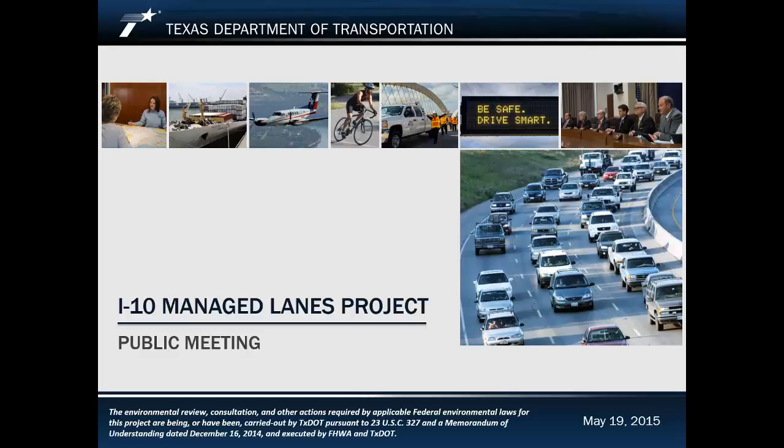Welcome to the I-10 Managed Lanes Project public meeting. We appreciate your interest and involvement in this project. The brief presentation will provide a basic overview of the project and let you know where to go for more information. Your input is critical to the project development process, and we look forward to hearing from you.

The purpose of our public meeting is to provide you with information on the proposed I-10 Managed Lanes project, which would add capacity to I-10 from FM 3351 or Ralph Fair Road to Loop 1604. This will be accomplished as follows. We will start by discussing how this project is tied to the $825 million plan. We will then explain the concepts as well as the benefits of utilizing managed lanes.

Next, we'll provide you with various project-specific details, including a summary of the environmental review process, a project development timeline, a proposed 3D video rendering, and multiple project schematics and exhibits in the next room. And finally, we will provide you with the anticipated next steps for this project and let you know of the many ways you can submit comments.

On April 28, 2014, the Policy Board of the Alamo Area Metropolitan Planning Organization, or MPO, unanimously approved amendments to the region's short and long-range plans to accommodate the $825 million plan. The $825 million plan represents a strategic partnership among the listed entities to implement multiple projects within the three corridors in San Antonio. This plan, which took years to develop, required a close working relationship between each agency and extensive public involvement.

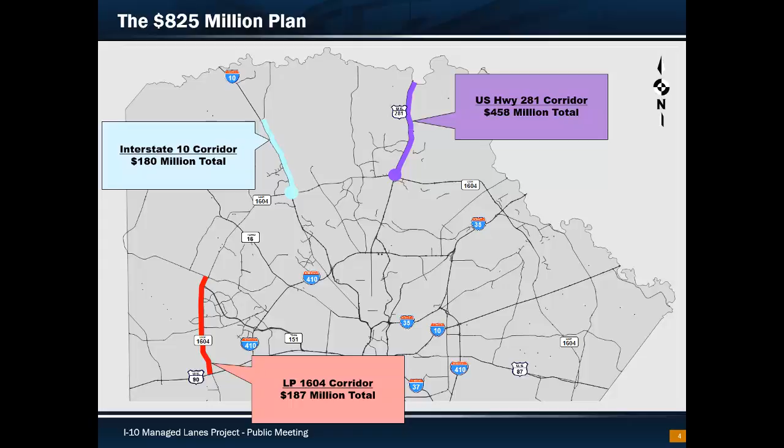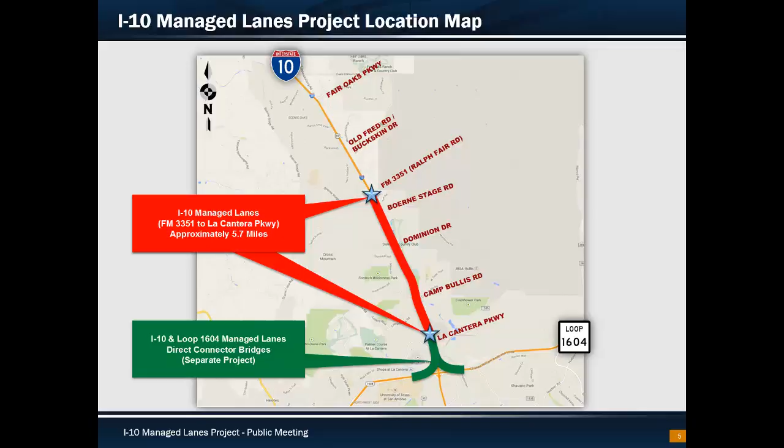When increased demand is combined with limited capacity, as in the case of the I-10 corridor, the result typically leads to traffic congestion. There are three possible solutions to mitigating traffic congestion. The first would be increasing capacity, which typically involves constructing additional travel lanes along the corridor. Second would be reducing demand, which entails encouraging the traveling public to utilize van pools, mass transit, or other alternative modes of transportation. And third would be controlling access or limiting the number of vehicles utilizing the interstate system.

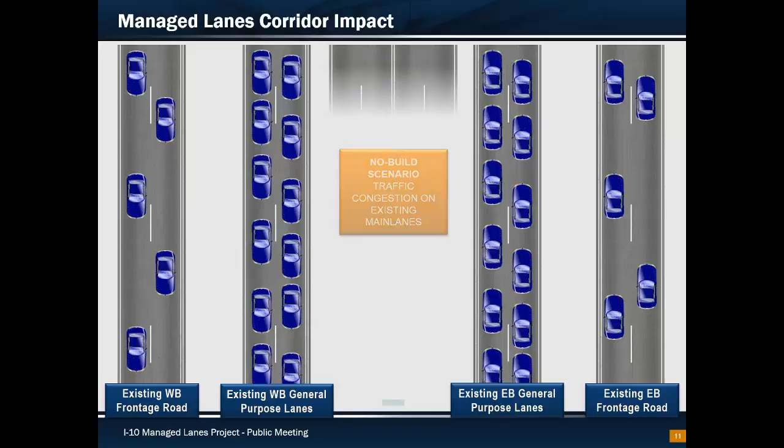By implementing the managed lane system, there will be a reduction in the general purpose lane utilization, an increase in general ridership, and additional alternative modes of transportation available to the public. This build scenario will ultimately reduce traffic congestion, provide a reliable alternative for motorists, and overall move more people through the I-10 corridor.

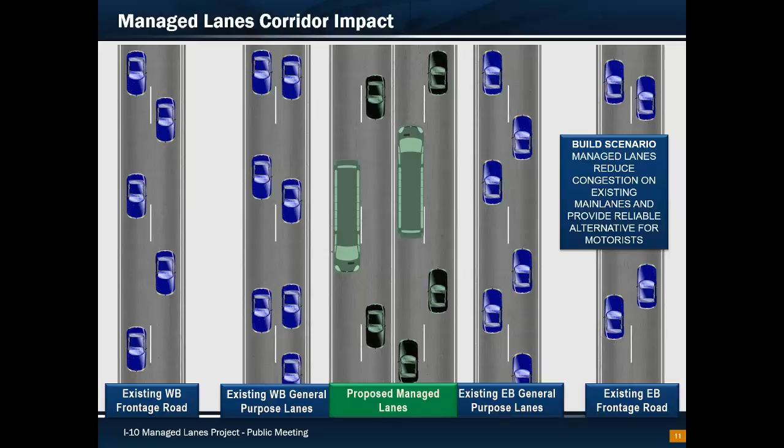As you can see, this will not be the first application of the managed lanes concept on a highway system. As of 2015, managed lanes have been implemented and are currently in operation in more than 30 locations throughout the United States. The benefit of this fact is that the Alamo RMA can utilize the lessons learned on previous applications to implement a more efficient and successful system from the start.

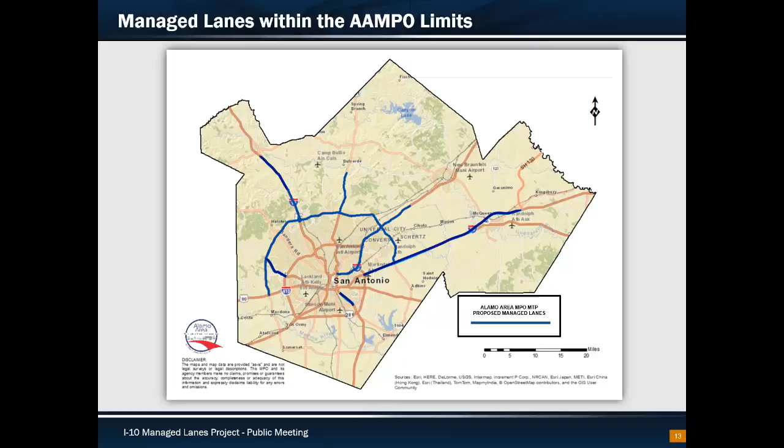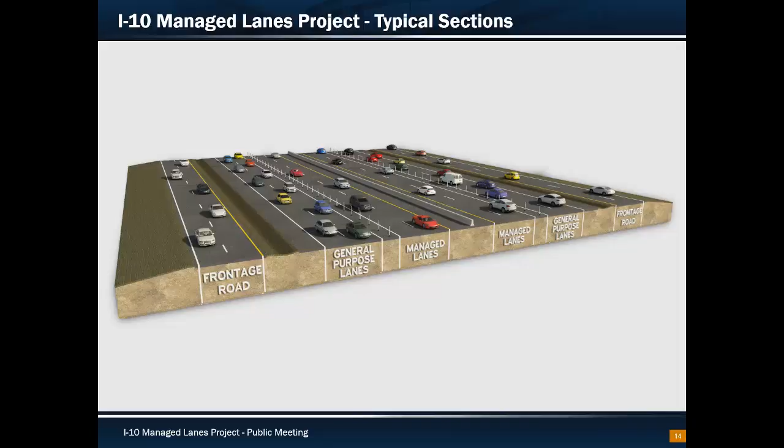The existing I-10 corridor consists of 2 main lanes in each direction with frontage roads as shown in this typical section. The proposed I-10 corridor will consist of 2 additional managed lanes in each direction while maintaining the existing main lanes, now referred to as general purpose lanes, and frontage roads in place as shown in this typical section.

As you can see, the proposed managed lanes will be located in the center median between the existing main lanes and will be separated by a proposed concrete traffic barrier. Also, the managed lanes and general purpose lanes will be separated by a buffer area that will include plastic pylons. While this graphic shows a typical section of the proposed corridor, it should be noted that the managed lanes will have entry and exit access points in each direction in the vicinity of Dominion Drive.

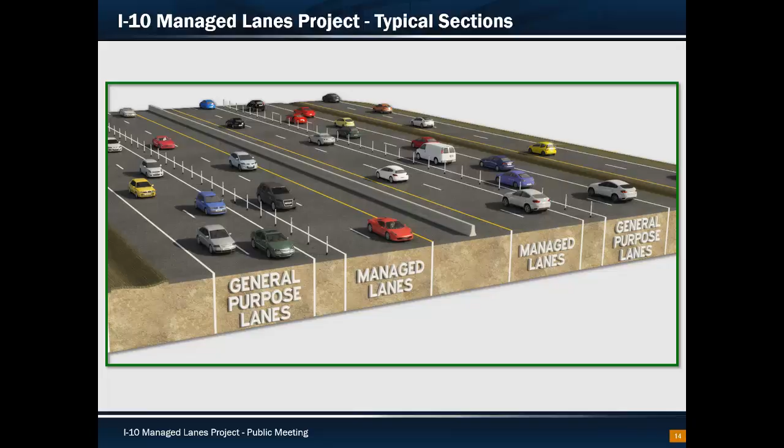Three key points of this project are: number one, the managed lanes will be added to the I-10 corridor and will increase overall capacity. Number two, the number of existing general purpose lanes will remain the same and will not be tolled. And number three, the use of the managed lanes will be a choice of each individual.

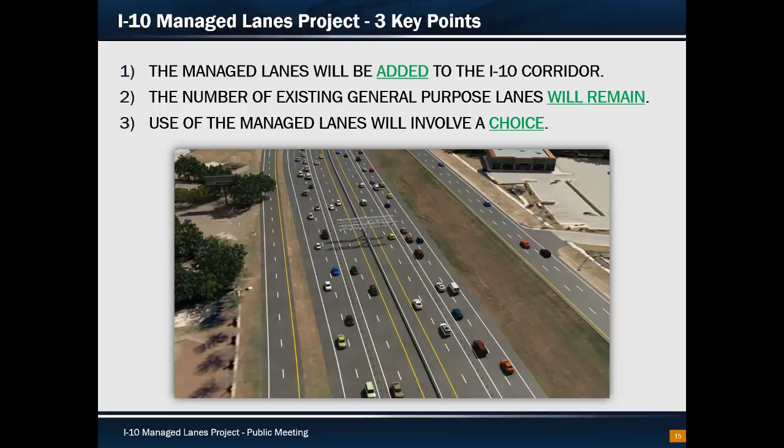It has been determined that an environmental assessment, or EA, is the appropriate environmental study to be conducted for this project. The project will need to adhere to all TCEQ rules and regulations as it is located over the Edwards Aquifer contributing and recharge zones. Impact studies for air quality, traffic noise, endangered species, and other standard analyses included within an EA are also currently underway. It should be noted that no right-of-way acquisition is anticipated in order to accommodate the proposed managed lanes.

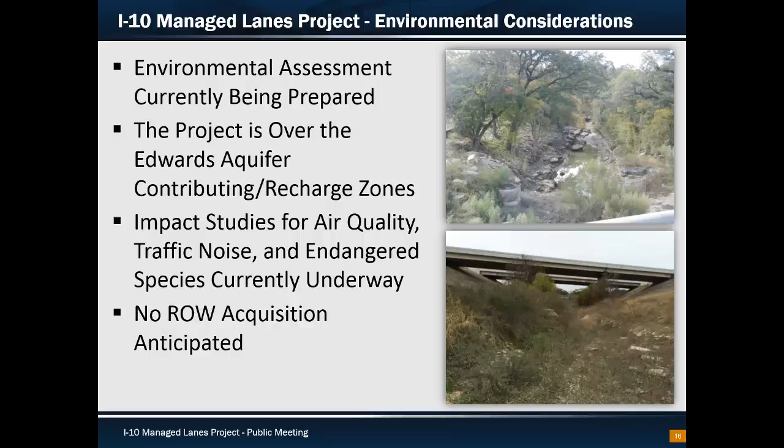A project stakeholder meeting was held in March of 2015, and of course, you are currently attending the public meeting today. Moving forward, the project schematic and environmental assessment will be finalized. A public hearing will be provided, and if environmentally cleared and approved, the project will be considered for alternative construction delivery methods in 2016. Based on this schedule, construction could begin in 2017.

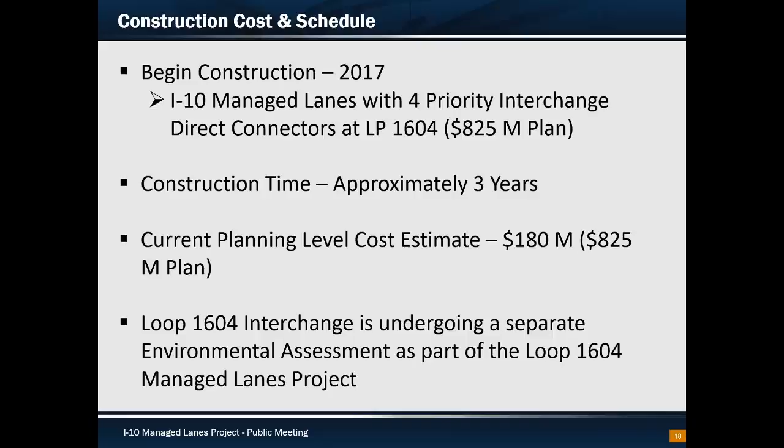The construction, which will include the I-10 and Loop 1604 direct connector bridges, will take approximately 3 years to complete. As previously mentioned, the current planning level estimate is $180 million, which is included within the $825 million plan. Also, the direct connector bridges at Loop 1604 are currently being planned for and environmentally assessed as part of a separate project.

In conclusion, we will now present a proposed 3D video rendering of the I-10 Managed Lanes project. If you have any questions about the 3D video rendering, please be sure to take notes and we will be glad to clarify any information with you in the adjacent room. Please note that the 3D video rendering begins near FM 3351 and terminates at La Cantera Parkway.